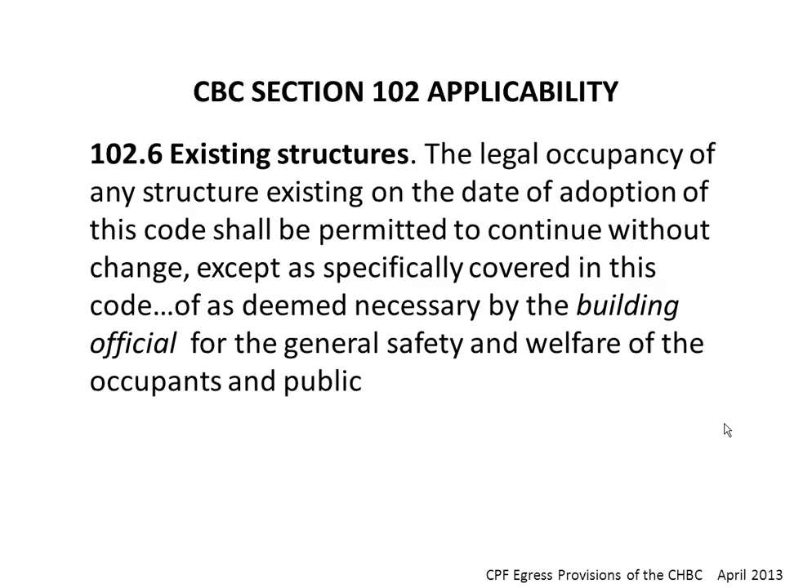If you go to the CHBC, again Chapter 1, you'll see that it goes further and specifically states that a qualified historical building can remain in use if it met the requirements of the code at the time of construction. It limits the discretion of the official here because it states that you have to find that a distinct hazard is present before it requires upgrades, and the CHBC defines distinct hazard.

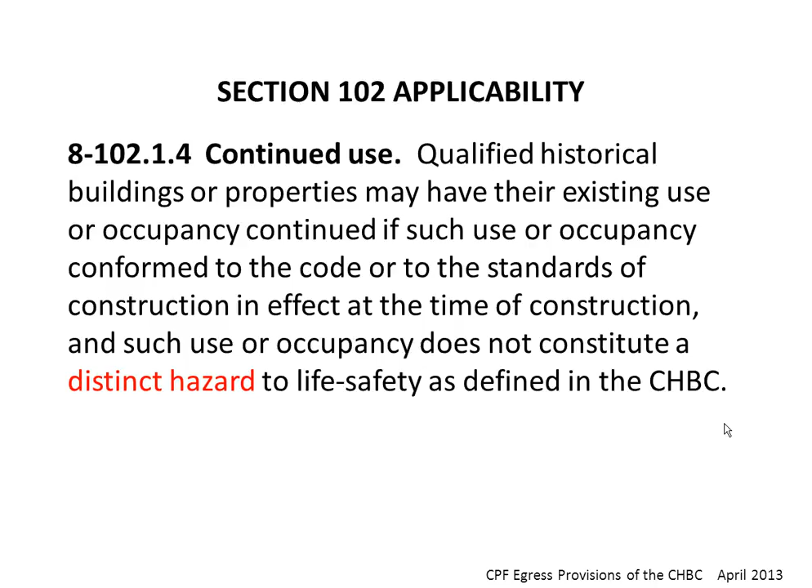You'll note that towards the end of this paragraph, it says that conditions that do not meet the requirements of regular code and ordinances do not of themselves constitute a distinct hazard.

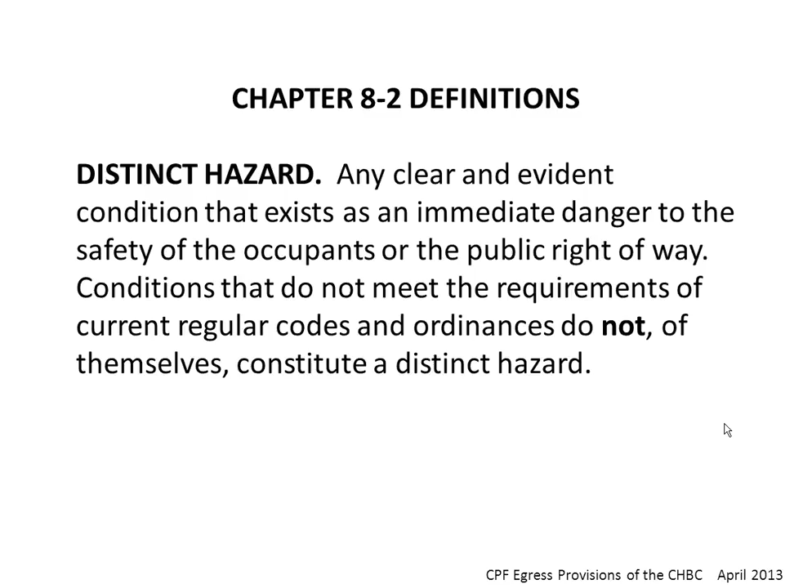In general, CHBC Chapter 8-3 states that if the occupancy of a historic building is changed, it must be determined that it must then be brought up to meet the requirements of the CHBC, not the regular code. There is no requirement that a qualified historical building be brought up to meet regular code.

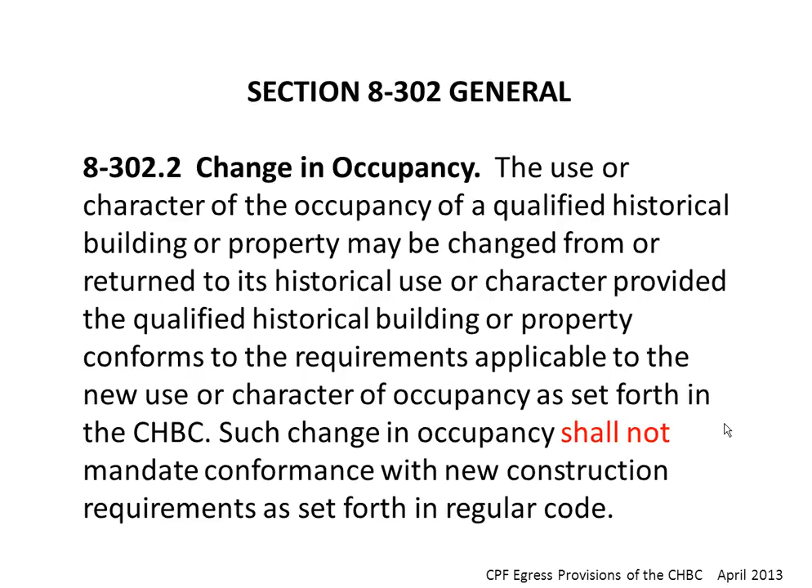I'm going to get into the specific elements of Chapter 8-5. As I said before, the purpose and intent are restated, and further, the requirement that a building official grant exceptions to regular code is restated as the basis for creating alternatives where specific provisions are not provided.

In terms of specific provisions, I'll go through those quickly and show examples where they seem reasonable. Existing door openings and corridor widths are allowed to remain in use, provided they are adequate for egress. Adequate is not defined. If the existing dimensions are close to meeting current code, they probably should be allowed.

So we're looking for other places to get indications of what an adequate door opening or corridor might be. For example, where corridors and doors serve accessible spaces, you would go to Chapter 8-6. There's an allowance for a door to be 29.5 inches minimum clear opening. That might be a reasonable place to start when looking for what is an adequate opening.

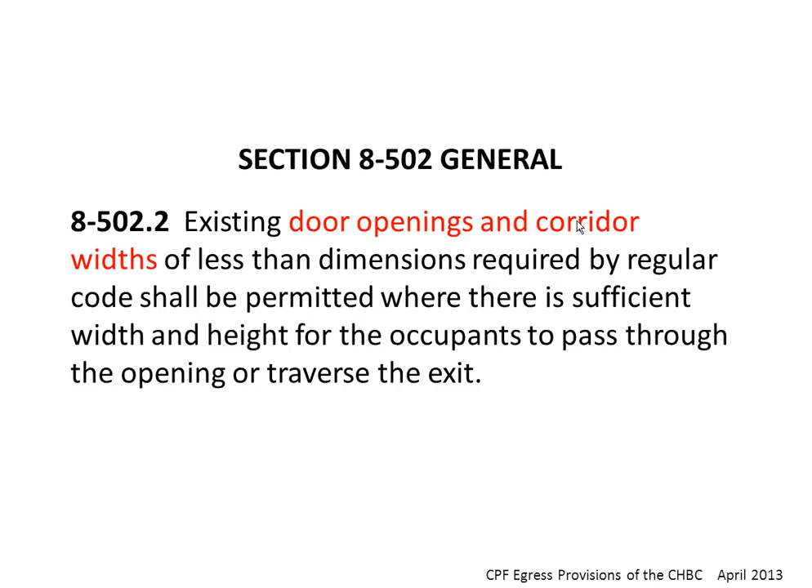Existing stairs. This is one of the areas where the code is applied pretty heavily. They are allowed to be maintained barring the presence of a distinct hazard. Non-conforming width, run, rise, including winders not allowed by regular code, are allowed to remain. Non-conforming handrails are also allowed, and non-conforming baluster spacings are specifically provided for under a separate paragraph dealing with railings.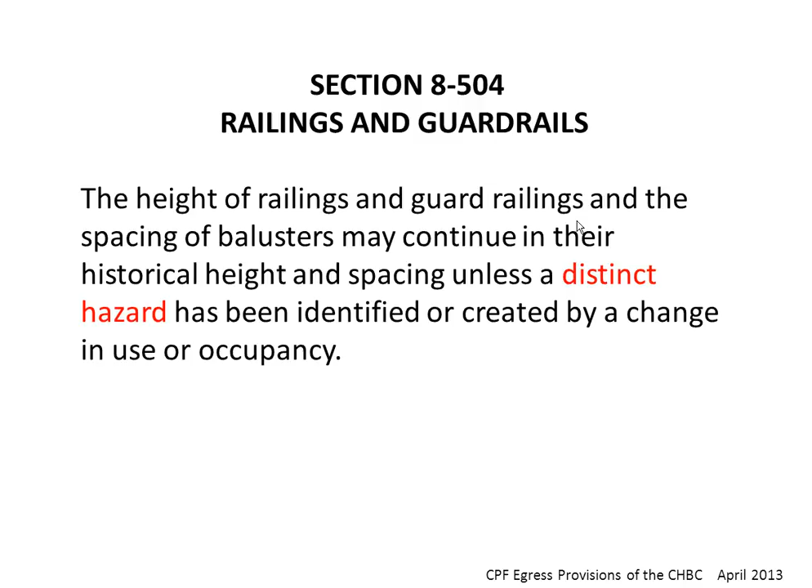Hey Alan, can I interject? I would just suggest that, especially with regards to railings, the notion of a distinct hazard has everything to do not only with the physical conditions, i.e. how far you're going to fall. The Winona case doesn't look like it would be too bad a consequence if you did topple over that railing, but also the nature of your use matters. If it's a use like the slide you're about to show, in say an office building or business use where people generally behave themselves, it's probably a lot less likely to be a distinct hazard. But in a use where people behave badly sometimes, as I'll show in my case study, that distinct hazard would have a different definition.

Yeah, and Chris makes a very good point.

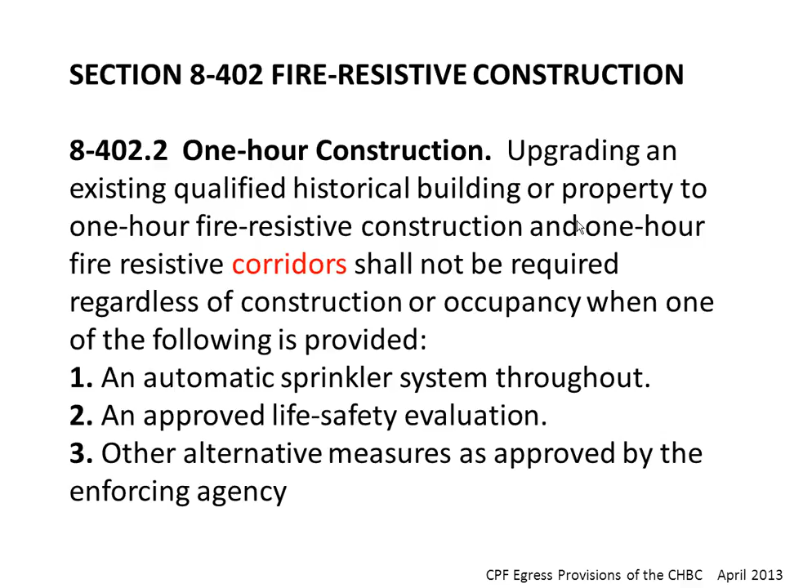When we went to the building department with this, trying to leave these stories open, we had a smoke evacuation analysis done by an engineer. What they showed was that the current venting in the dome and the height of the dome itself actually allowed for a good deal of accumulation of smoke in that area without affecting the lower stories, while people would have a chance to exit the building.

It was determined that the 5th story was close enough to the dome that it might be affected, so the decision was to enclose that and leave the others open. This would not typically be allowed in regular code without either a more complying exiting system or smoke evacuation equipment that we couldn't actually fit into the building in terms of protection of historic material.

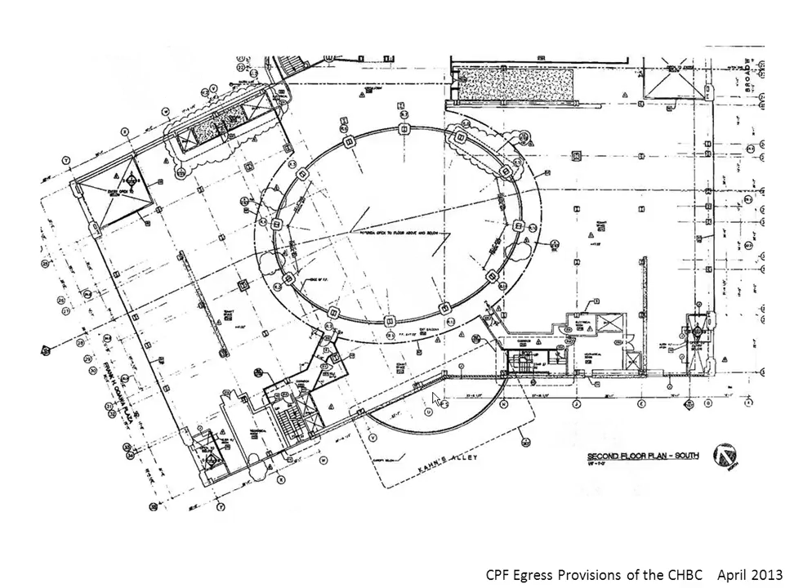The exiting distance was also longer than was allowed by code, but again, with the provision of an evaluation by an engineer that showed that there would be time for exiting before smoke might intrude into these spaces, it was allowed to remain that way.

The next provision I wanted to look at, and Chris is going to show you some examples of how that was applied. You are allowed to have openings in fire-rated systems, and here we're talking about corridors specifically.

Historical glazing materials were typical in office buildings of the 20s, where there were doors and transoms and windows that were provided to allow for transmission of light from the outside into the interior corridors, which is a nice feature of the buildings.

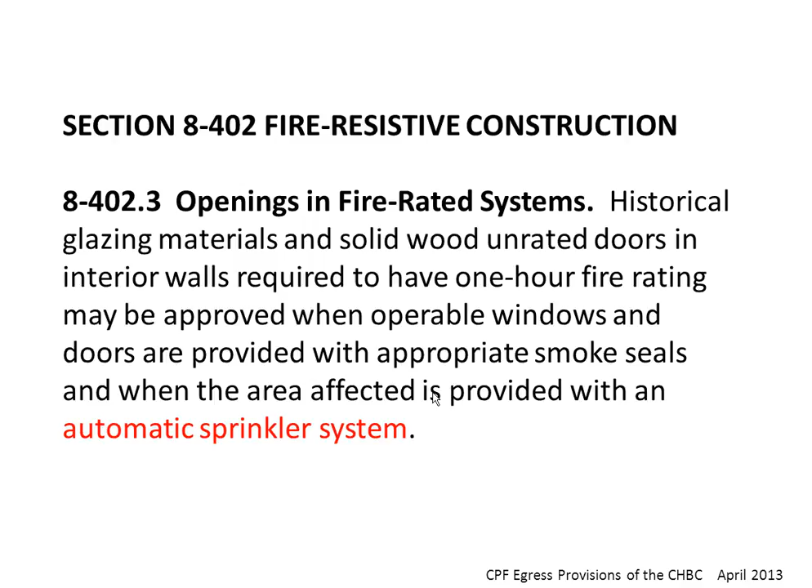What the CHBC does is it allows these to remain in place with the provision of smoke seals and with sprinklers provided on both sides of the glazed areas.

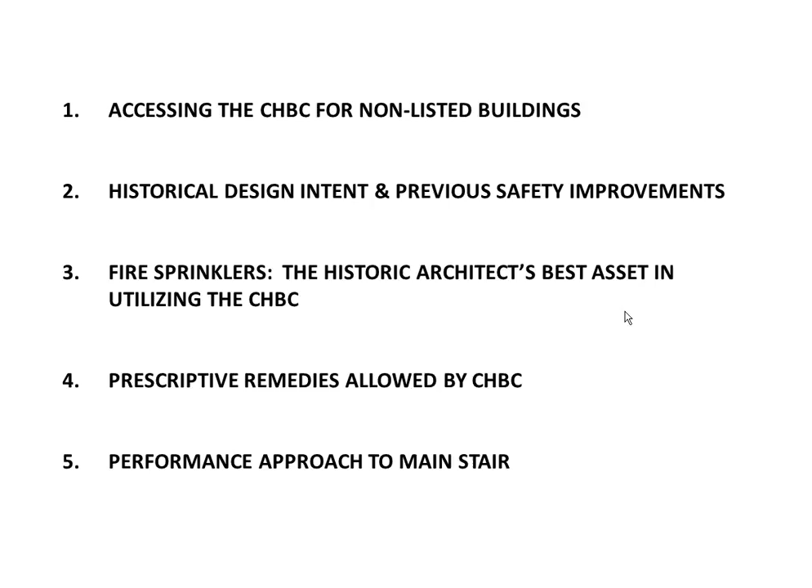This building certainly looks historic. If you evaluate the credentials of Bakewell and Brown, it certainly meets several of the criteria for historic eligibility. I think any reasonable person would say, boy, that looks like a great historic building.

The university, in their wisdom, has a policy against listing any of their resources, and it occurs at a very high level in the university, well above that which they let the architects talk to, and it basically is a remnant of a perceived land use restriction that they want to reserve their rights for these buildings to do what they want. Of course, that's sort of a false sense of security under CEQA, because nowadays, especially in the last 5 to 10 years, preservation planners have gotten really rigorous about evaluating buildings all over 50 years, whether they're listed or not.

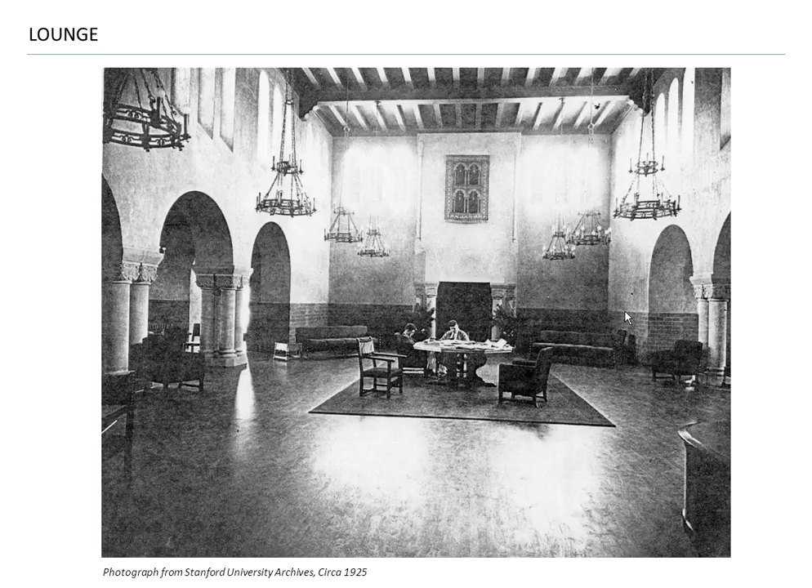Or in the words of the building official, when I decided to vet this approach with him, he said, 'Eligible says who?' And what we did is we commissioned a credentialed preservation architect, recognized and well known locally to building officials, to prepare a nomination form which clearly demonstrated that it was eligible for even national recognition.

And then we marched it into the jurisdiction and talked to their planner. Now, at the time, they didn't have a preservation planner, so their planning department was a little bit hesitant. Nowadays they do have one, and it's much easier. But at the time they were still sort of scratching their head—this was a between-the-lines approach that they couldn't check a box for.

So we ended up taking it up to CHBC for a courtesy review of the nomination form. Even though CHBC had no jurisdiction over this project, they wrote a friend-of-the-court brief in support of this. And the building official, to his great credit, went and conferred with the county counsel and came back and said, okay, we're going to allow this.

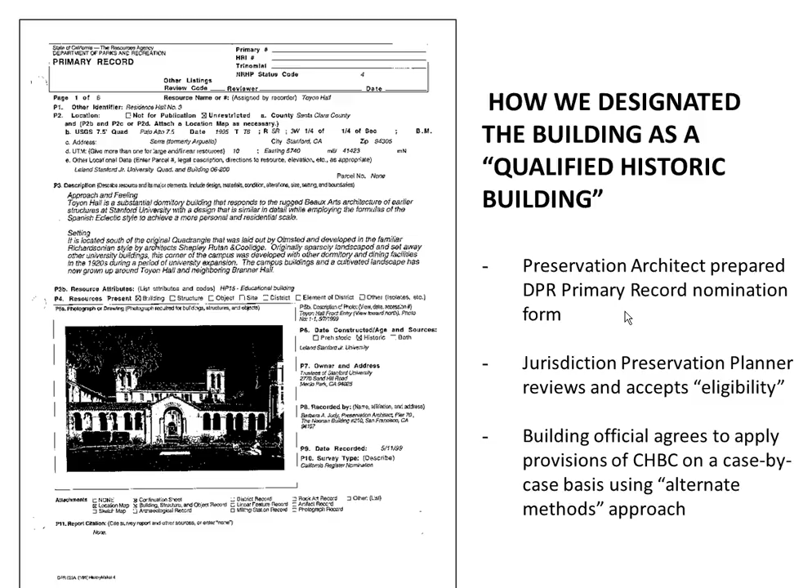I'd like to talk a little bit about the building and its initial DNA, and then some of the changes that had occurred to the building when we got to it. I don't mean this juxtaposition of slides to be in any way a cheeky disrespect to the fire marshal.

As I interjected in Alan's presentation, you have to think about who the occupants and users of this building are. There are 250 late adolescents, early adults—18 and 19-year-olds living away from home for the first time—and they've been known to get up to all manner of hijinks and even take a drink now and again. So the fire marshal, quite rightly, and the building officials were doing their job to make this building safe and conform to codes that weren't in existence in 1923.

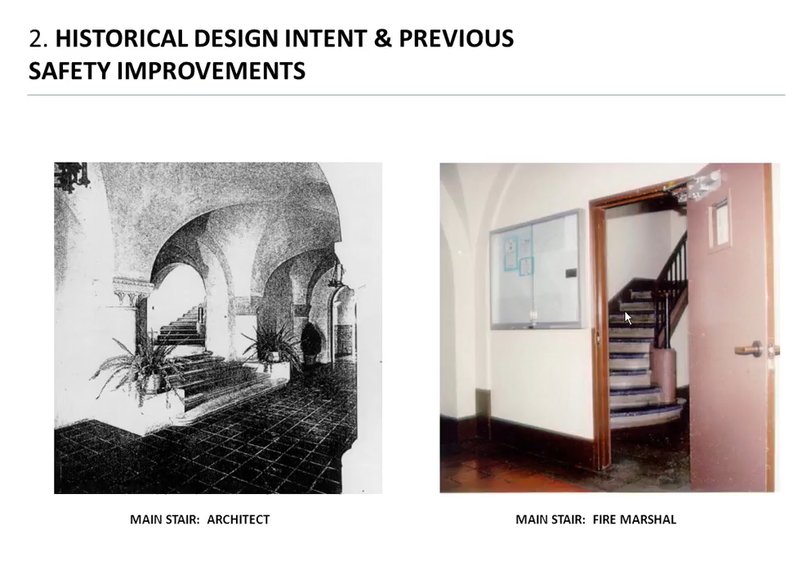But the net result—and of course I completely support that mission—the net result was it was done in a kind of piecemeal fashion, where the university didn't have the money to wholesale renovate the building at the time. So they would do these small interventions that had a big impact, as you see on the right.

Here's a typical first and second floor plan—this is actually the ground floor plan, a typical beautiful Bakewell & Brown floor plan with absolutely crystal clear circulation. The center portion of the building is the big lounges and lobbies with the public spaces, and then the finger wings are double-loaded corridors.

But in order to mitigate that long, endless corridor feel, they had glass transoms above all the doors to student rooms—those are the arrows going up and down at mid-wing—which allowed both light and air to penetrate the corridors. The long views down the corridors terminated through glass doors, in the horizontal dimension, into either the main lobby or a more modest lounge at the end of the corridor with an architectural fireplace and feature, and in the up-down direction, at major stairs or entrances. So every view was very carefully framed, and the corridors had quite a nice feel originally.

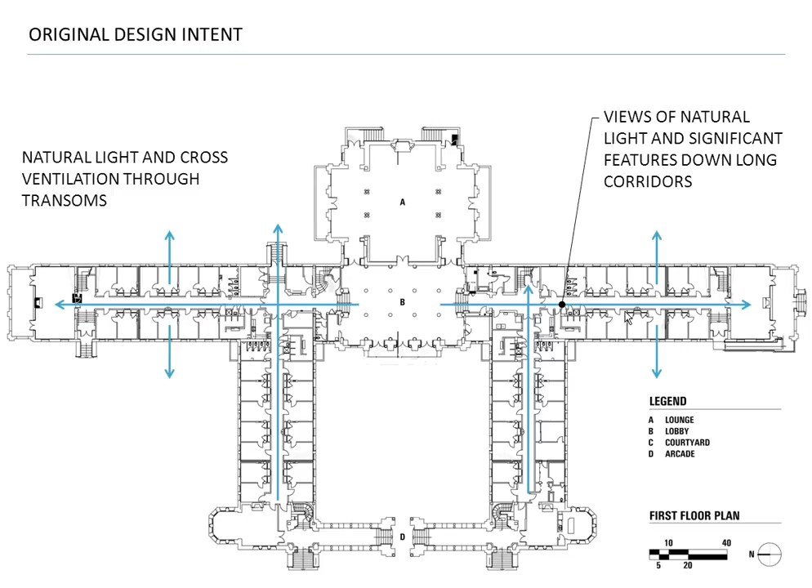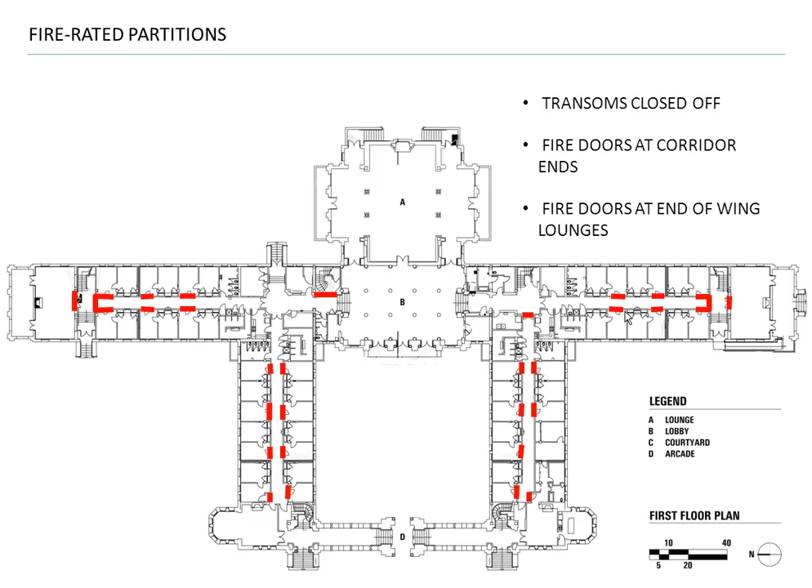The fire marshals, though, in an effort to create nominal one-hour construction and one-hour fire enclosures for the exit stairs at the ends of the wings, basically boarded up the transoms and the glazed lights and doors, and took out French doors at the ends of corridors, replacing them with standard-issue 3070 hollow metal fire doors. So the corridors became quite dreadful in their feel, quite dark. The building lost a lot of its character.

Finally, in an effort to separate the A from the R occupancy—R1 being the congregate residence, a fairly hazardous occupancy, because not only are these 18 and 19-year-old Stanford students doing all manner of ingeniously stupid things, but they're sleeping in the building while maybe their neighbor is burning a candle in their room. So it is a hazardous occupancy. This building had fires, and people are asleep, so quite rightly, the building officials were very conservative. In this case, the blue lines indicate occupancy separations between the A3 and the R1 occupancy, so that trouble wouldn't spread from, say, a party raging in the lounge down the halls. But again, it really violated the partie of Bakewell and Brown, that beautiful long view down the vistas of the corridors.

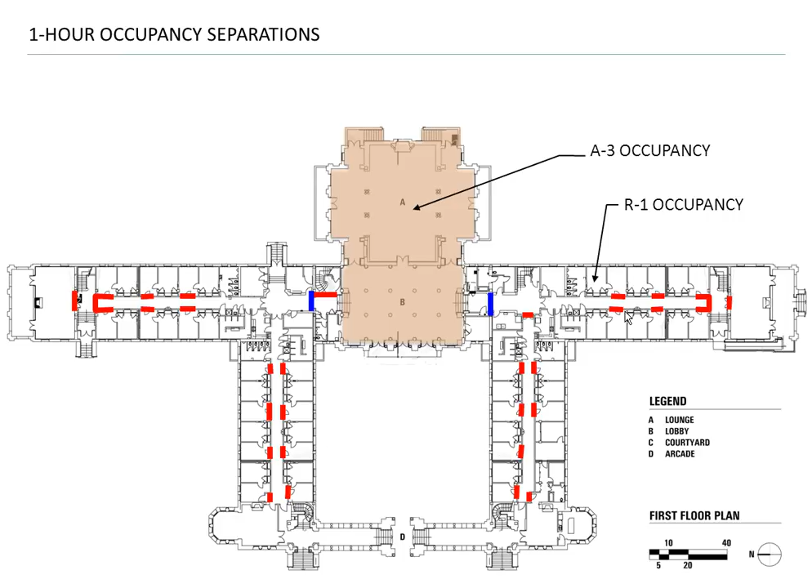We're very fortunate—unlike the piecemeal approach where small projects had been done to create safety, we had a very major project here. It was over $10 million, doing a seismic project, and doing wholesale, whole-cloth improvements to the building, which was a great advantage.

One of our charges, because it's university policy, was to fire sprinkler the building and install a compliant fire alarm. As Alan alluded to, and I'll stress, fire sprinklers tend to be the easiest way to leverage most of the remedies under the building code, both prescriptive and performance. I've been in many meetings with fire marshals and building officials, and when you state emphatically that you're going to fire sprinkler the building, the creases between their brows tend to relax, and they breathe a sigh of relief, because it's probably the one thing you can do to a building that increases its life safety coefficient the most dramatically.

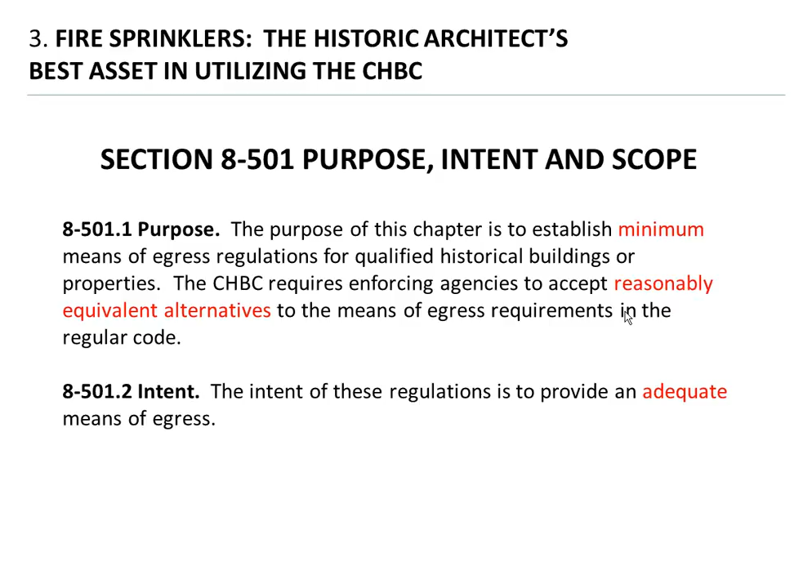But again, the intent of the code is to provide minimum standards, reasonably equivalent alternatives, and an adequate means of egress—not a good one, not a great one, but an adequate one. So the code doesn't set the bar incredibly high. However, as Alan pointed out, the words 'reasonably equivalent' and 'adequate' are ones you have to come to agreement on. You can't look them up in a dictionary and point to a particular solution. So even though the building official has an obligation to use the code—in this case a negotiated obligation for a non-listed building—that doesn't mean they'll agree on what all these standards are. So it's best to think of your building official as your partner and not your adversary.

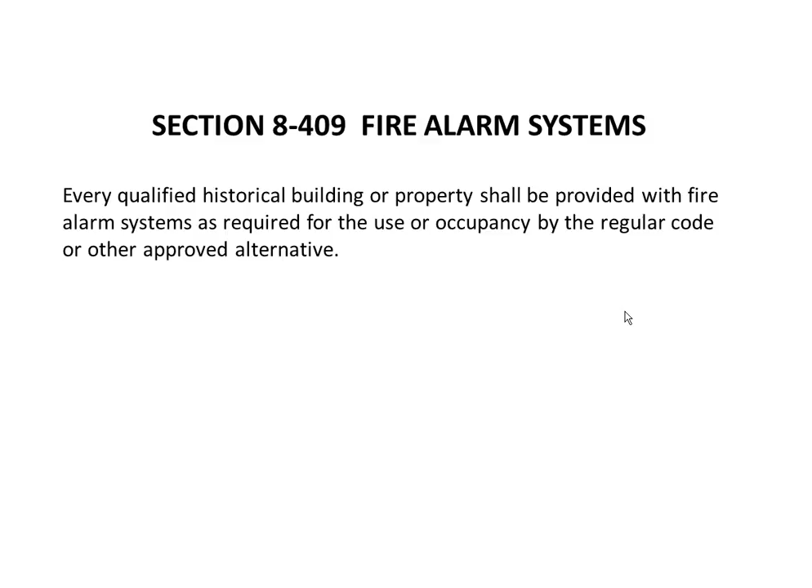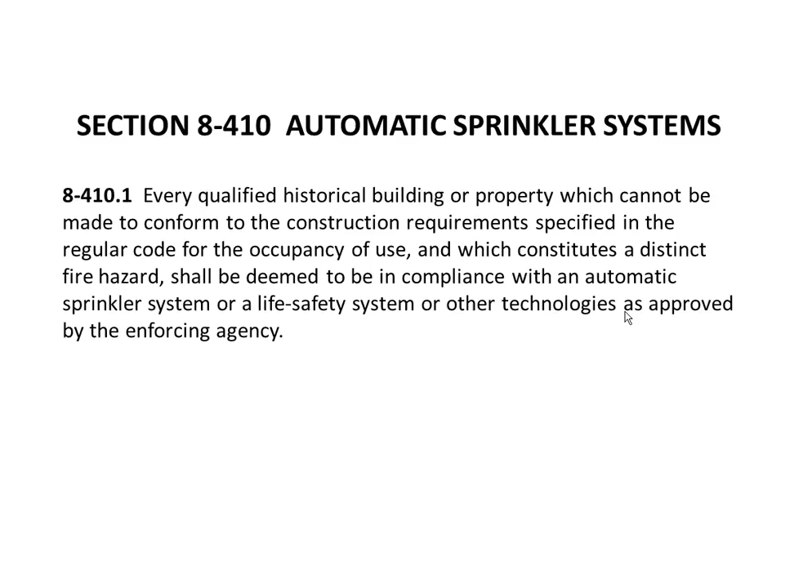Fire alarm systems are one of the prerequisites for accessing most of the juicy stuff in the CHBC that helps you preserve fabric, and that's generally relatively easy to integrate into buildings. But sprinklers are really the prize—in this section, it even says they can mitigate a distinct fire hazard in and of itself with no other improvements, and of course they allow the prescriptive things Alan described, like elimination of 1-hour corridors and restoration of historic glazing, etc.

Interestingly enough, though, the buck stops there. You cannot use that to substitute for the required number of exits, or even the distribution of exits. So it won't go that far.

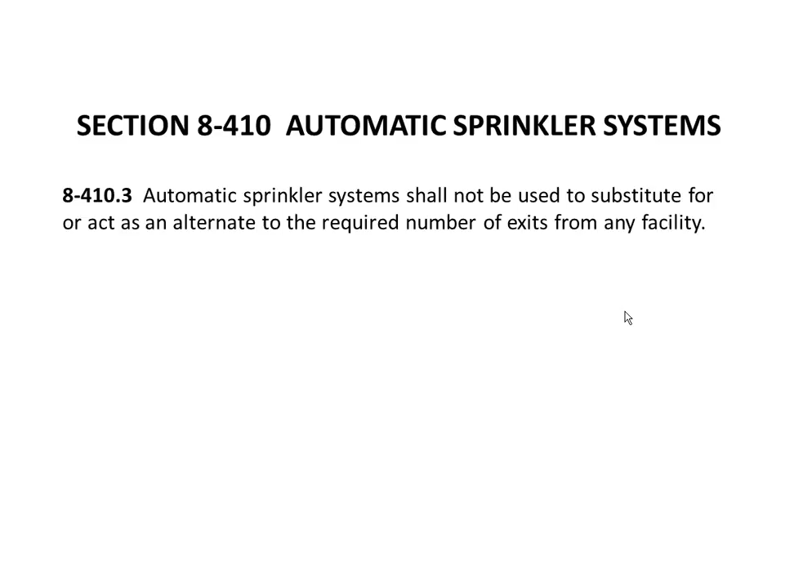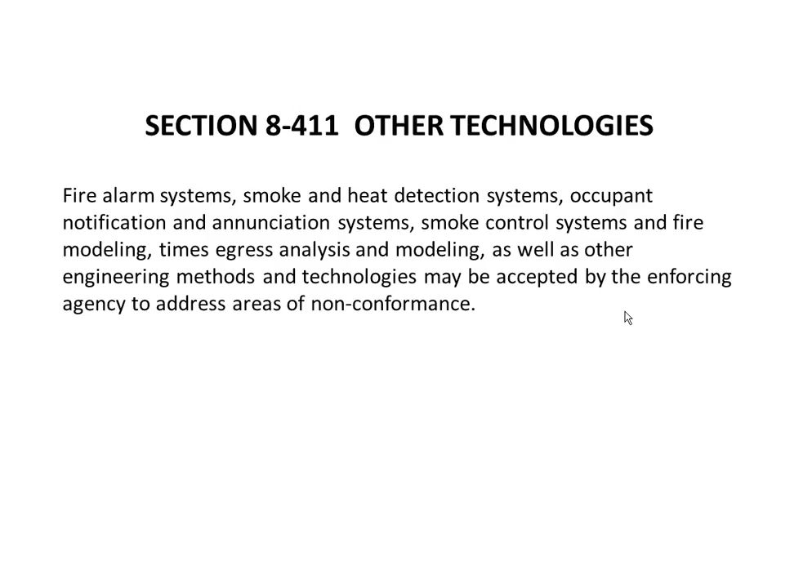And there are other technologies, which I don't have a lot of experience with, but there are these higher-tech approaches—smoke and heat detection and evacuation, or simply a building model that shows there's time to get out. I think Alan used that example at the Rotunda building. I've not done that, but of course they're available to us.

Now, congratulations—you've got the building official to agree that if you sprinkler a building, you can do X, Y, and Z. Now the hard part starts. Oftentimes I'm sure we've all been in historic buildings that may have used this provision, but then ran a 3-inch sprinkler main down the lobby, and to what end? You're preserving historic fabric, and you're also sort of denigrating it. This was really true in this building.

The most challenging aspect of inserting these life safety systems was in this groin-vaulted lobby.

You can see on the left, when we got to the project, they had already put in a fire sprinkler system with festooning the ceiling with lots of conduit. Just imagine a 3 or 4 inch fire sprinkler line running through that space. So we were really ambitious, and we didn't want to kind of destroy the building to save it.

We also got very lucky and found an exposed space above the floor, on the floor above - this is on the ground floor. The structural slab above had a furred space above the concrete and below the finished floor of about 4 inches. We were able to carve open that space and run our fire sprinkler piping, alarm conduits, and quite a bit else in that little 3 or 4 inch space you see in the detail on the left.

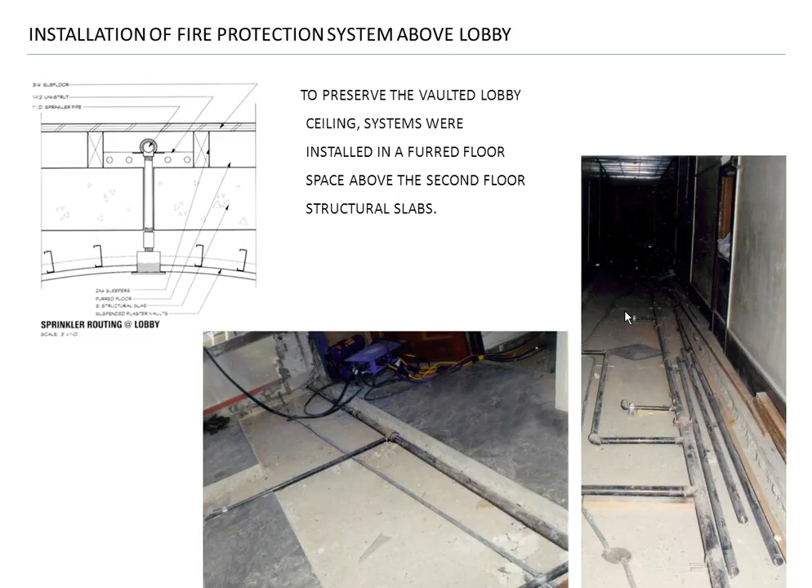That had the fire marshals and fire sprinkler maintenance folks scratching their heads, because they usually like the piping and valves for their systems to be on the same floor as the equipment. But we were able to negotiate that through at a shop drawing level. They got it to that level of detail, and then we covered it all. We documented it very carefully so they know where the pipes are if they had to get to them, and then we covered it back up with wood. So we accomplished that very sensitive space, and all you see are devices - there's no distribution, piping, or conduit.

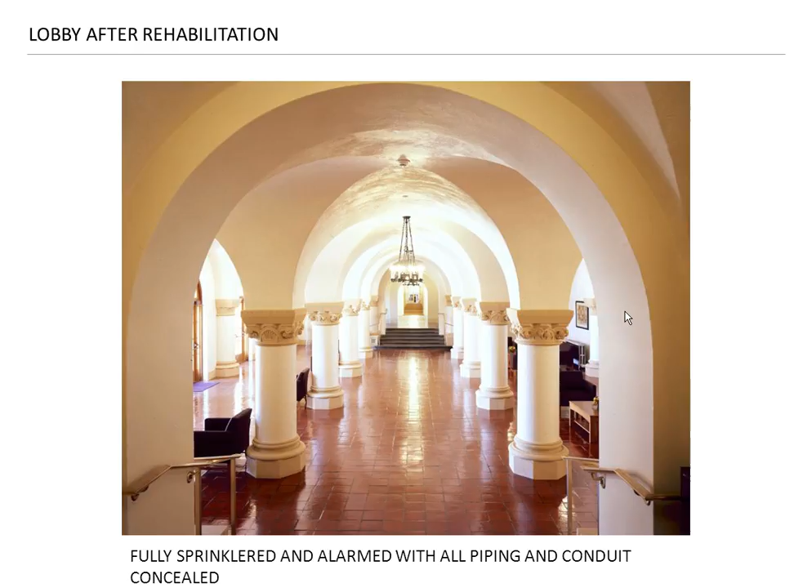So every building has its own challenges. That's one we particularly relish, and sometimes we're able to conceal it, sometimes not, but it's something you really have to pay attention to and not do more harm than good.

So these are some illustrations of many of the same prescriptive things that Alan talked about, with a couple of twists.

This is that stairwell you saw earlier, shown in the slide on the lower right. We were able to take those fire doors out and replace them with glazed doors. Under the CHBC, technically we could have made those regular old doors with non-rated glass. Because the technology is now available for fire-rated glass, and it was simply an economic issue, we elected voluntarily to say, look, we're going to put back the glazing. We're not going to make them rated in the traditional sense, but we're going to put in FireLite glass, and I think we got a 45-minute rating. We didn't have to do that, but it all played into a building-wide approach that would pay off in a negotiation over the main stair.

So my lesson here is, don't necessarily take everything that the code gives you. If there's a reasonable technological solution that exists now and maybe didn't exist 20 years ago, and if it makes sense, take it.

Similarly, we didn't have to raise the guardrails, but we did, and we provided handrails on both sides of these stairs. We could have probably negotiated our way out of that, but didn't feel it was necessarily prudent.

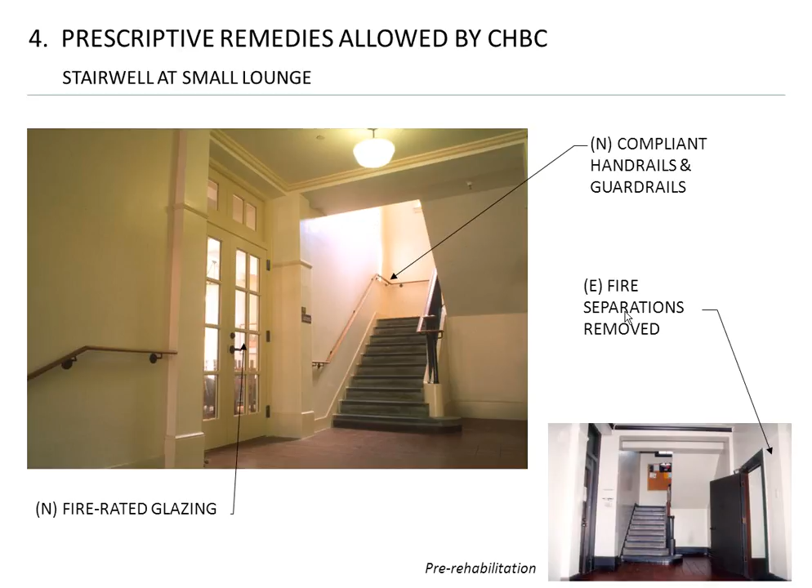Here's essentially the top of that stair from the second floor, and the slide on the right's a little crummy, but it should illustrate a drywall partition with a 3/0 hollow metal door in it. We were able to take that out, so we opened up these kind of improvised stair enclosures to the corridor, allowing the natural light from that great big window to spill into the corridor.

Here again, though, there was a 32-inch balustrade, and we raised it to 42. We could have tried to negotiate away from that under the prescriptive aspects of the code, but did not feel that was safe given the occupancy and what these kids get up to. In fact, there had been an incident at this building - I don't know if it was this stair or another where a kid fell and was seriously injured. So the building official, owner, and architect were all in complete agreement that it doesn't make sense to preserve a little bit of historic character at the risk of safety. So the technical thing we did is we declared this a distinct hazard, and we went ahead and mitigated it.

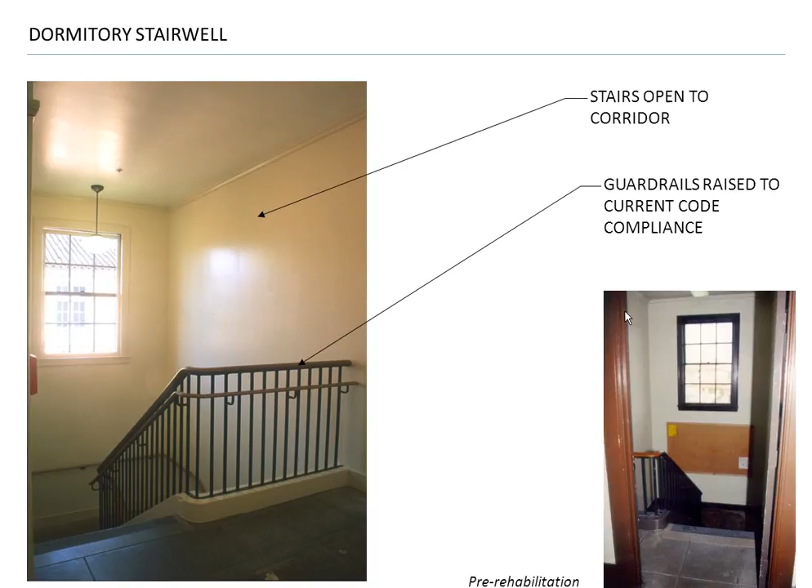Yeah, certainly you don't have to declare it a distinct hazard. What we're continually looking for is the balance of preservation of historic material and the provision of what we consider to be a safe occupancy. So I don't want to confuse people into thinking you have to call it a distinct hazard - that's an adversarial position generally brought in by the building official himself.

I'll talk about the relationship we had with both the owner and the building official toward the end, but I'll just say it was highly collaborative.

Probably the biggest prescriptive remedy, the biggest bang for our buck, was cleaning up these corridors. What you don't see are the new fire sprinklers - we furred the ceiling down just slightly and were able to conceal everything. We reopened the glass lights and transoms, and the amount of natural light that floods the corridor now is remarkable. At the end of the corridors we now have French doors instead of single hollow metal doors, and because the corridors are so long and become a de facto student social space, people leave their doors open. An incredibly important improvement to the life of the house.

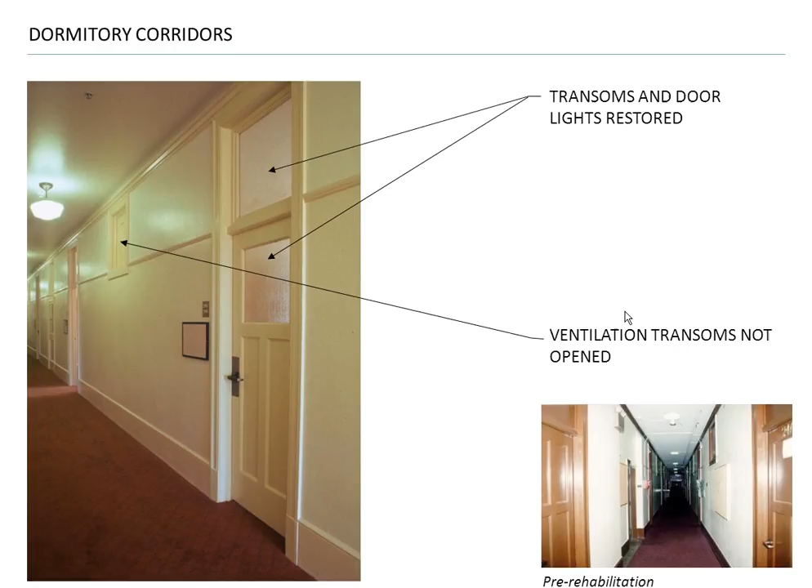Although, one heartbreaking thing for an architect - I went back and many of the students had covered up their glass transoms with posters and stuff, because the night lights and emergency lights from the corridors shine in, and if they had a window next to one of the night lights, they would cover it up. So you can't design around that. I guess we should have come up with a better egress lighting scenario.

I'm going to conclude with what I call a performance approach to this main stair, which you saw earlier. There was nothing prescriptive that applied to this. When it was originally constructed, it connected three stories with no smoke or fire barrier, and I assume that was allowed in 1923, although we had no documentary evidence of that - we couldn't find codes from that era. It connected an A and an R occupancy, and even worse, the R occupancy had to exit through the A. So on the theory that hazardous things could happen in the A during a big event, the egress load for the dormitories above would pass through this, and everyone was very uncomfortable with that.

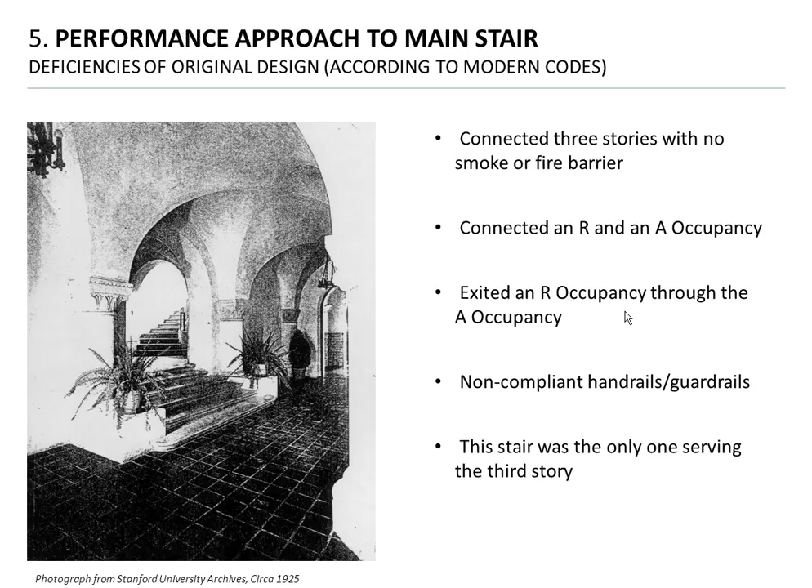It didn't have any compliant guardrails or handrails, and it was also the only stair that served the central third story I pointed out in the original photograph. That was probably the biggest problem - there are about 25 residents on the third floor, and this was their only stair down.

When we got to the project, you saw the image on your right earlier - they had enclosed it with similar architectural detailing at every landing. So at one, two, and three it still discharged through the A occupancy at the lobby, and there was no second means of egress except for a fire escape.

I believe the fire escape was actually original to Bakewell and Brown. Fire escapes are probably a good idea for some occupancies, but here it was more of an attractive nuisance - you see it on the upper right in red. That fire escape was 50 feet in the air, with some pretty tall floor-to-floors in this building, maybe 35 feet, high enough to be precarious. It exited down onto a lower roof, so it was a treacherous journey down, and students used it for all manner of recreation, as well as a potential pathway into the building for intruders.

So from an institutional point of view, even though it's allowed under the CHBC, no one liked this. I didn't feel comfortable with it as the second means of egress, and nor did the building official, even though it's prescribed. So here's another case where our judgment was: let's not avail ourselves of this remedy, but look for a different one. You can see on the left the stair terminates - this is the top of that main stair, and that was the only one that connected all this.

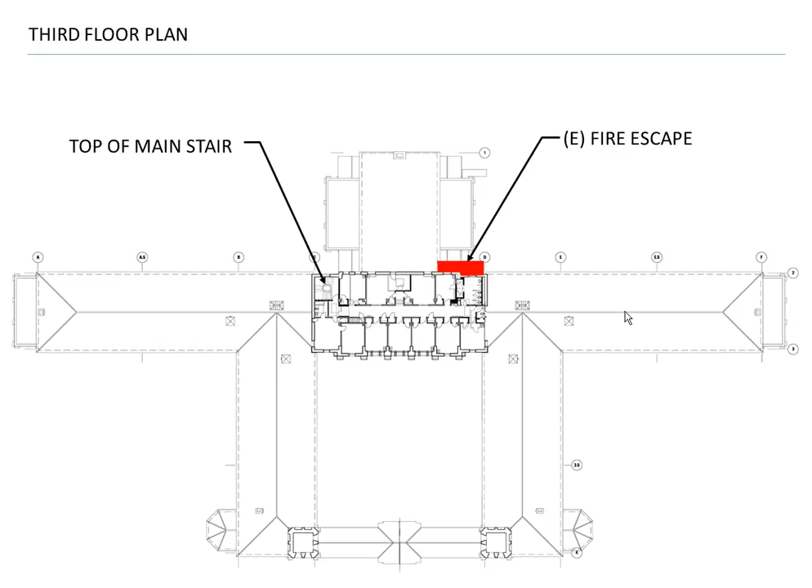So what was our compliance strategy? Well, first of all, we worked really hard to develop a level of trust with the building and fire officials by meeting with them early and often in a working environment, literally sketching and working on alternatives together, all metaphorically sitting on the same side of the table rather than apart from one another.

We said we're going to sprinkler the building, have a compliant alarm system, and then we started throwing in things we maybe didn't need, like fire-rated glazed enclosures at all the floor landings, not just the main stair. We were not going for the minimum adequate approach, but trying to make the building as safe as we could. We provided compliant guardrails, handrails, striping, egress lighting and signage, and all the things that make stairs and exit enclosures safer.

We were able to sneak in a second internal stair from the third to the second floor, under the roofs of the adjacent flanking wings, sort of building a ship in a bottle. It was very intricate, but it met all the code clearances, and we were able to remove the fire escape. In return, we were allowed to reopen the bottom of the stair.

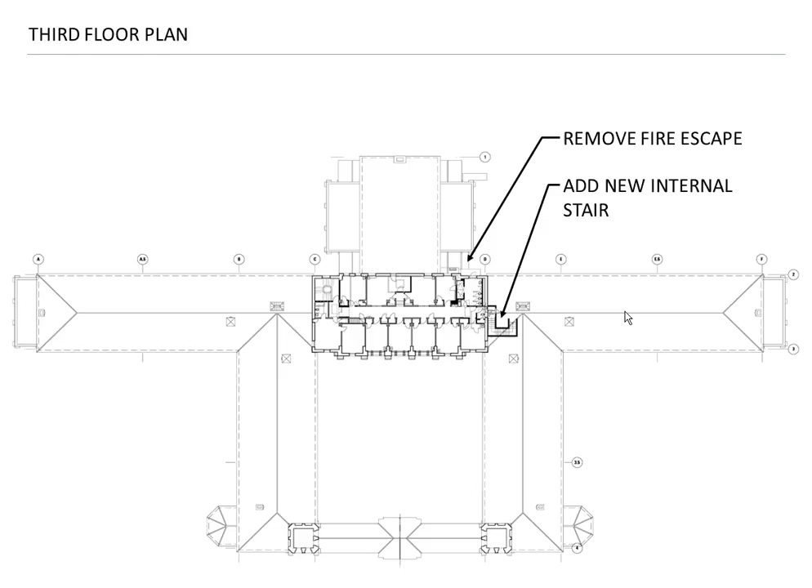Really the lesson of it was that we tried to use a combination of regular code solutions where possible, combined with CHBC solutions. Within the CHBC, we used a combination of prescriptive and performance solutions. In fact, we tried to limit the use of prescriptive standards if we didn't need them, and strengthen the level of safety elsewhere in the building to get the building official to look at this as a holistic approach rather than issue by issue.

So if we were able to make a stair at the end of a wing more safe through a combination of prescriptive and performance approaches, it sort of alleviated their worry load on the main stair.

The third point is probably the most important: we had a really terrific collaboration. It was never confrontational, and we had a working relationship where anyone could veto something if they felt it wasn't safe, and we wouldn't push it. It was amazing how, in some cases, the building officials were a little more—I don't know if I should say daring or simply flexible—than we were. But we had 100% consensus on all of these things.